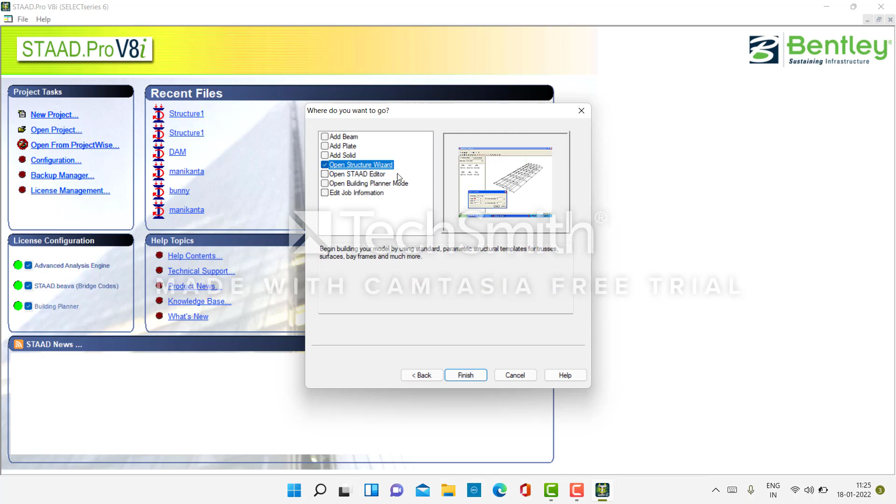Click on next, go to open structure wizard and complete the page. Then the interface looks like this. Go to frame models and select bay frame, then double click.

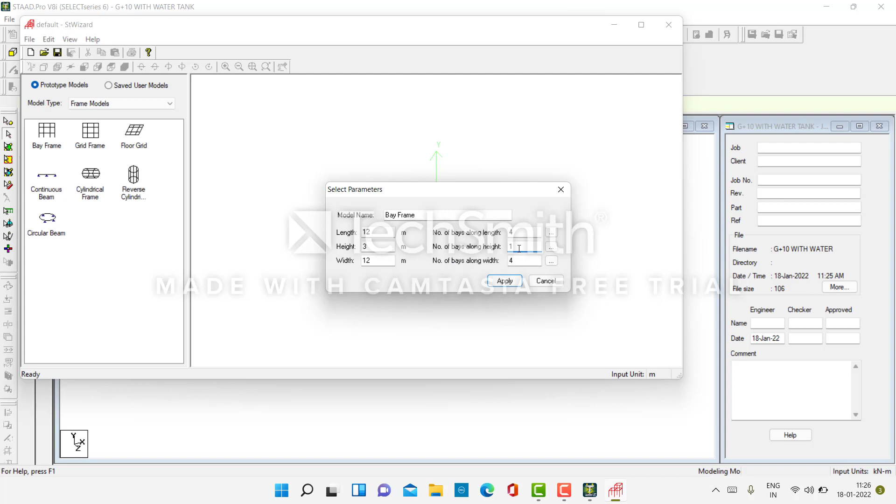In bay frame, length and height: length is 12 meters, height is 3 meters, width is 12 meters. The number of bays along the length - here 4 means columns and beams, known as 4, and here also 4. This is the floor - how many floors it will contain is known as the floor. Click on apply.

The structure will be available like this. Then close it, click OK, and click on OK.

The interface looks like this. Go to the top view, go to cut section, and select to view. Click OK.

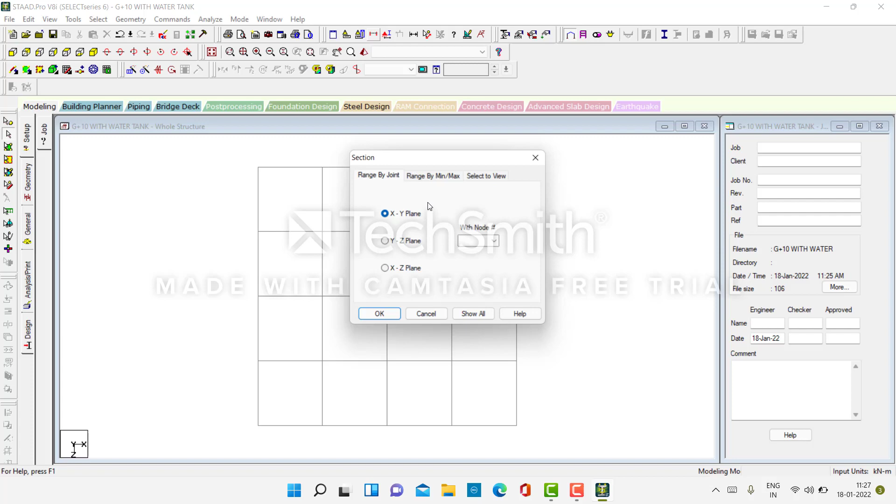Then select which side you want - this side or this side or this side, your wish. Which side you want, you click easily. Go to cut section and select to view, then click OK.

Then drag it to select one side. After that, go to the isometric view and select the beams.

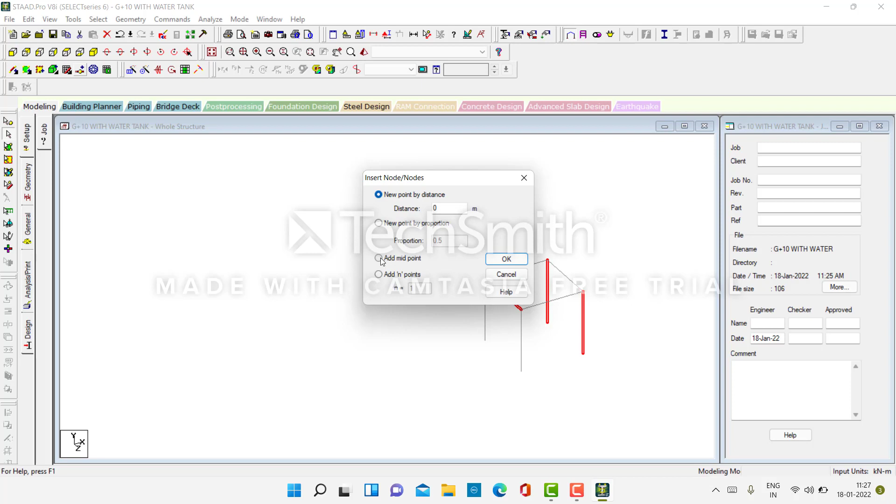Please control-select the beams. Then go to isometric view and insert the node, clicking on midpoints. Then click OK - it will come on the midpoints.

We can go to the node cursor and we can see the midpoints like this.

Then select the midpoints, Control C, Control V, in the X direction minus 1. Click OK. Why should we take it as -1?

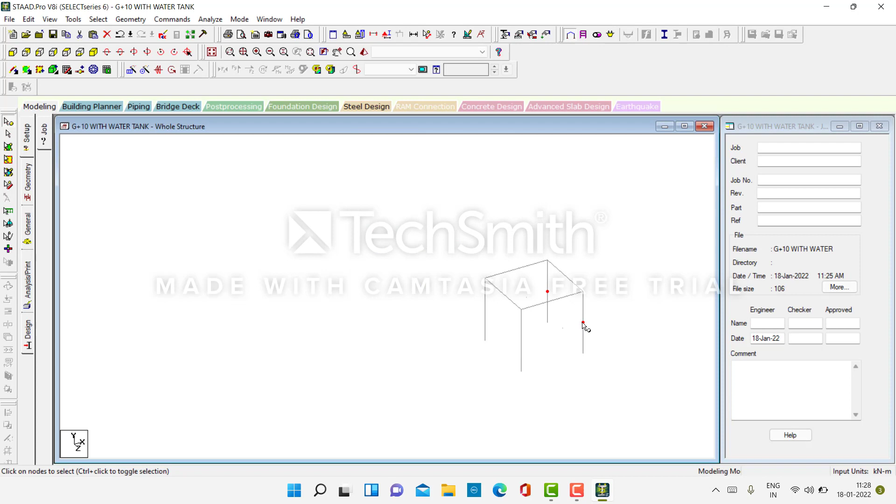It will come to the steps. I want the steps, that's why I click it like this.

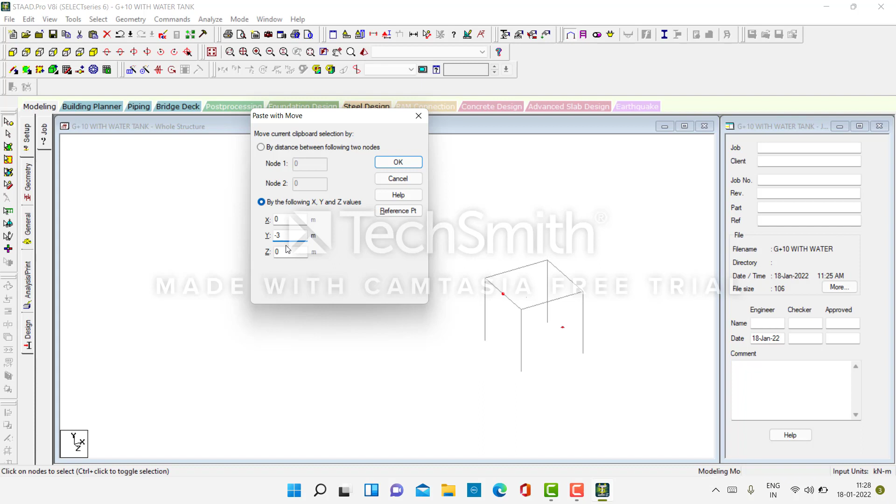Click here and exit, Control C Control V, and the direction - we can see the directions here is -3. It's downward, so I need -3. Click OK.

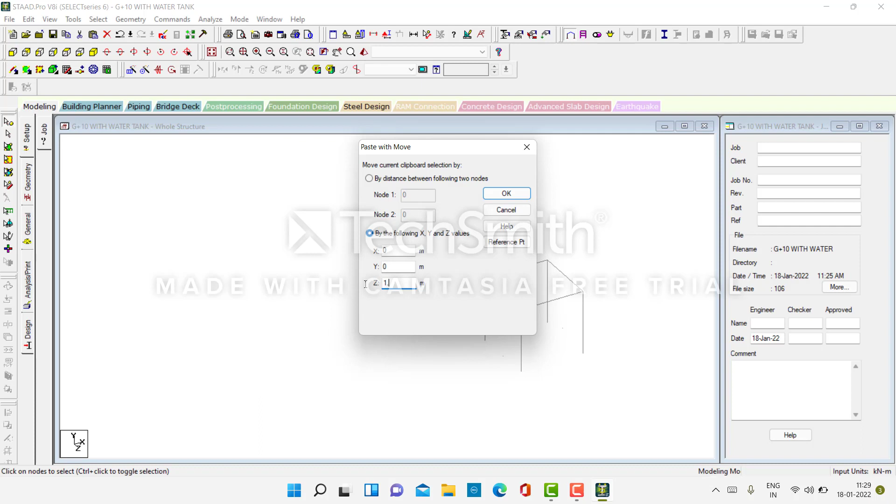We can easily see the node points. Then click here, Control C Control V, in the Z direction 1.5 - I need midpoints.

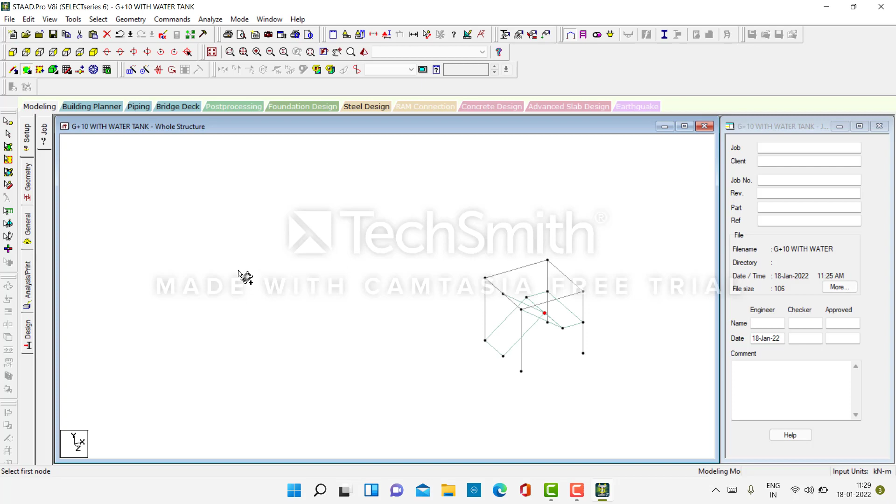Here we can see the midpoints. Then we easily add the node points here, here, here, here. Then we add it here, here, here, here, here, here, here. Then we add the beam cursor here, at these points here.

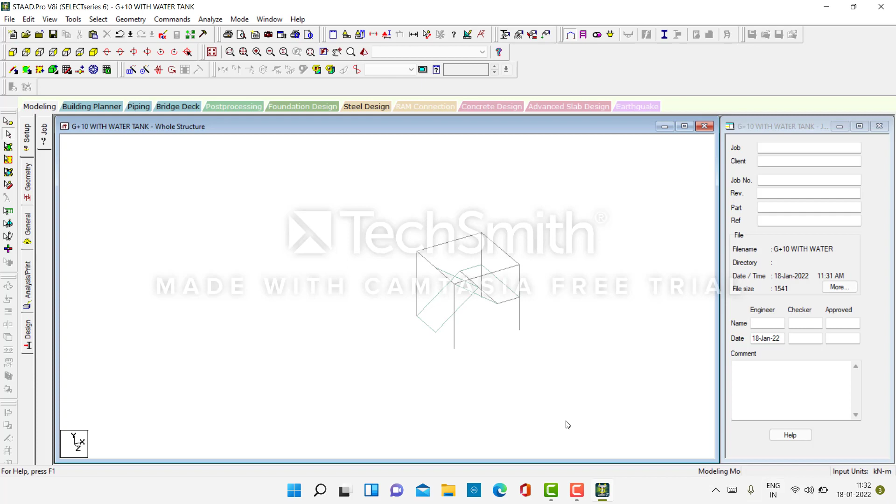For these points we add it like this. Then go to the whole structure and go to the node plates, adding the node plates here for these points.

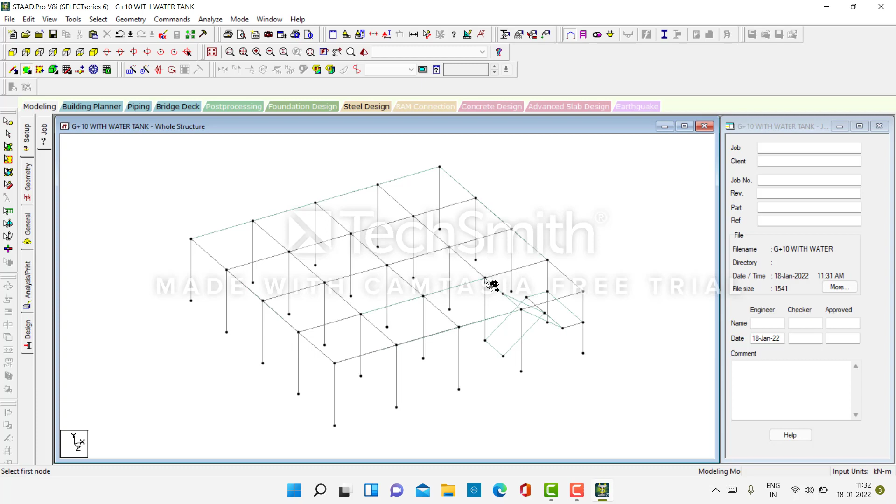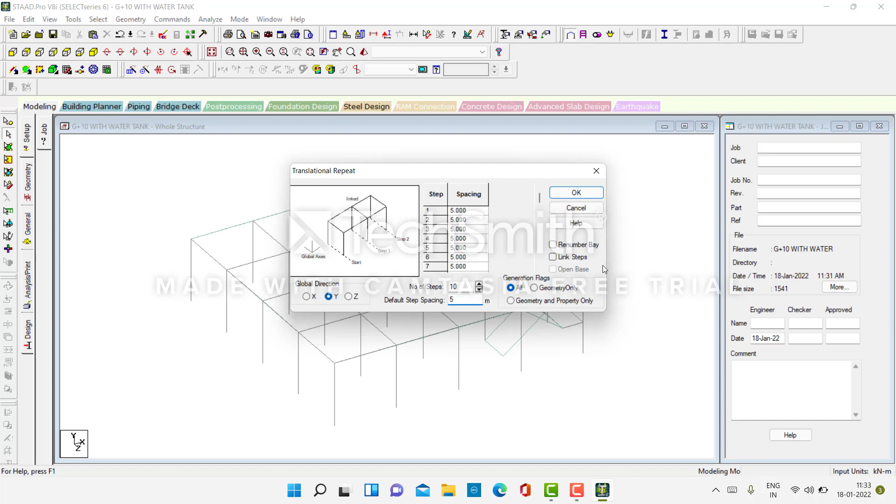Then go to translational repeat in the Y direction - it's toward the upward direction. So the direction is Y direction, up to 10 floors, and the height spacing is 5 meters, and linked steps should be added. Click OK.

First we select Control A - first we select all the structure, the whole structure. Then click OK. It will come like this.

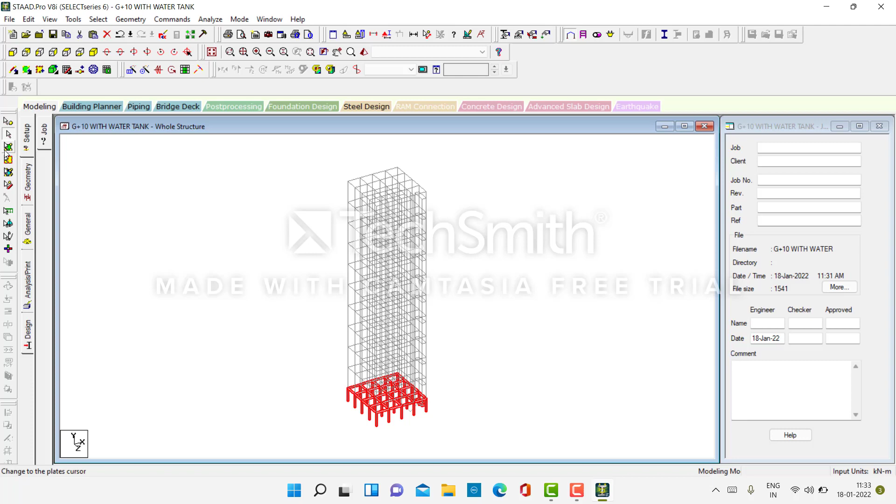Then go to the plates cursor and select the plates cursor, using the same translate method - translational repeat in Y direction at the steps of 10 floors and height spacing of 5 meters, then click OK. It is easily added - we can see it like this.

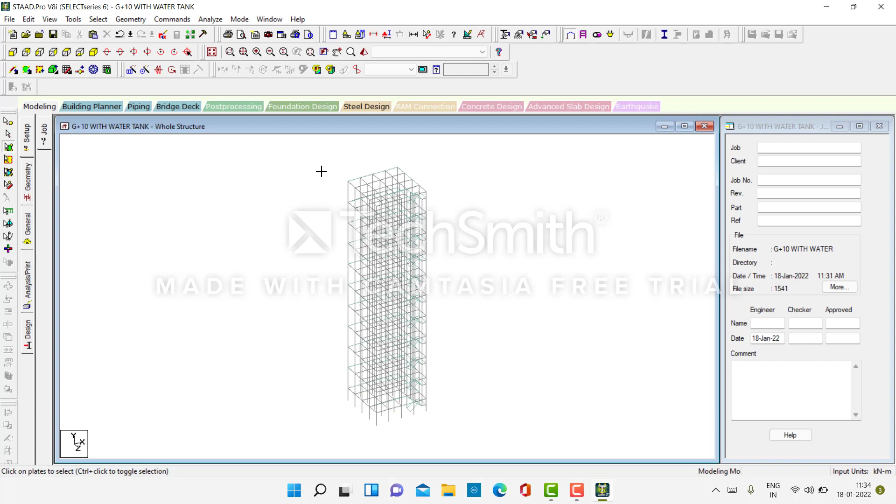First we select the node points - go to the node cursor and select the points. Which are my points?

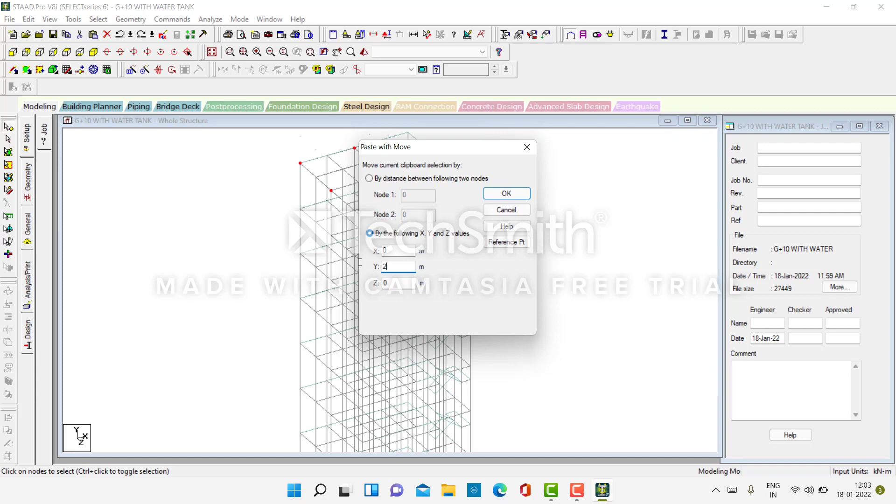Control C, Control V, in the direction of height - the tank height distance is 2 meters. Click OK, and we can see the node points here.

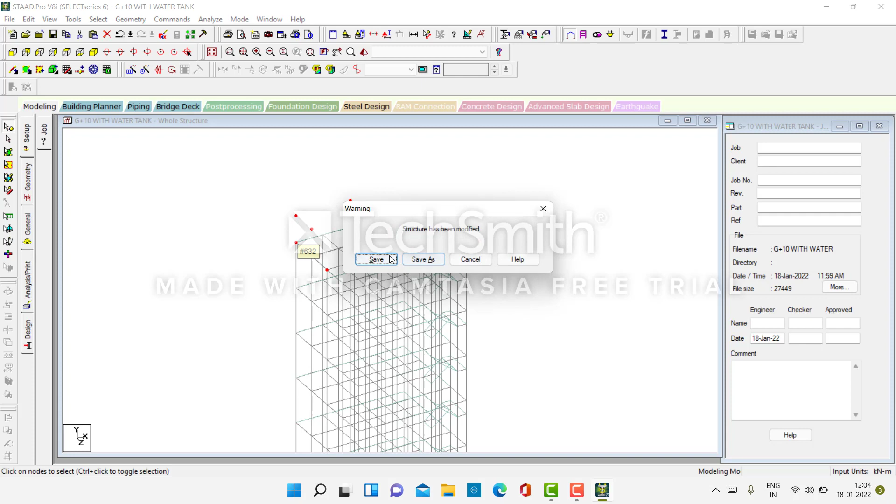Then click here. Then go to geometry and go to connected beams along the X direction.

Go to geometry, connect on the X direction.

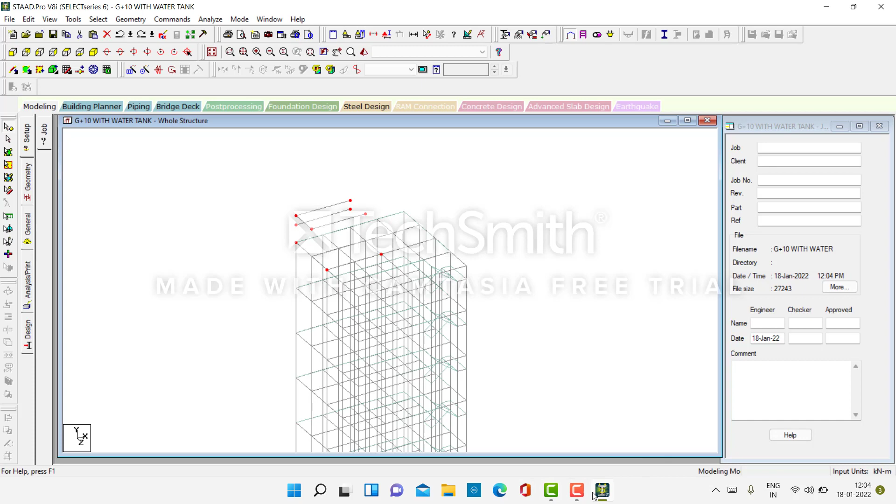When we select both node points, go to geometry and connect to the beam along the X direction, and geometry along the Z direction.

By that we get the node plates of the tank structure. Go to node plates and add the node plates - these points should be added.

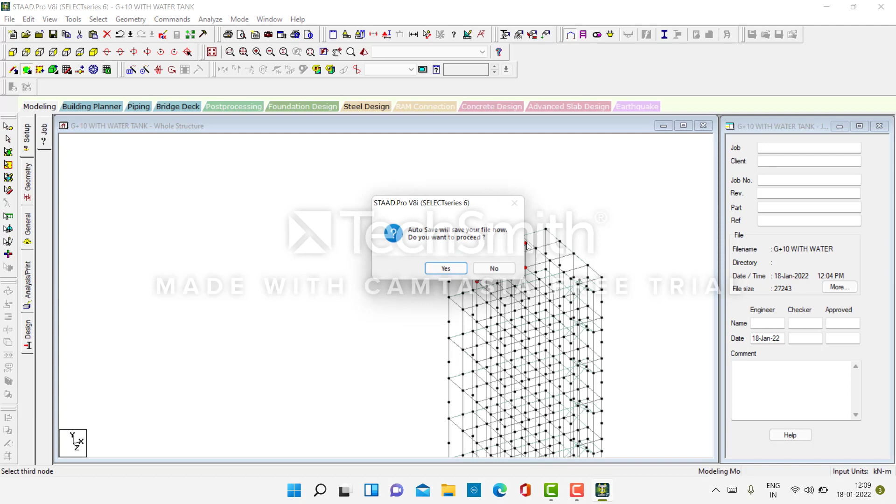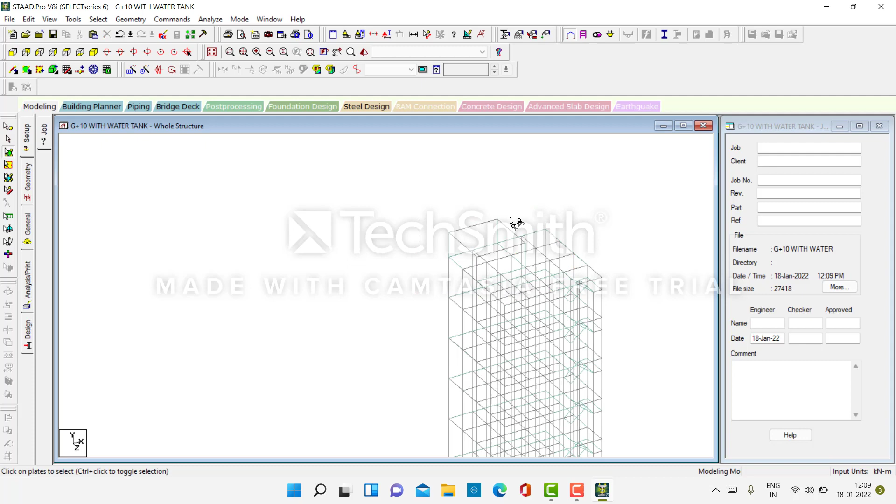We can see them easily, which box we can apply to. We added 3 sides only, so we can add this side and the back side. Go to the node plates and select.

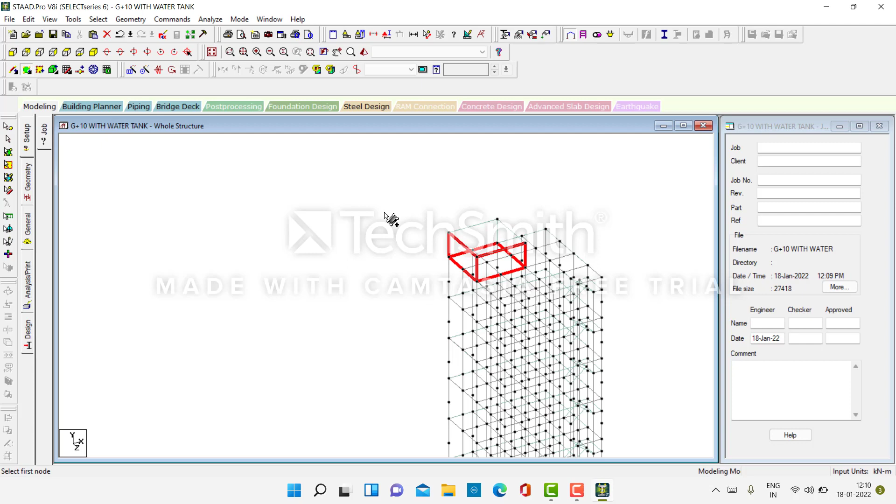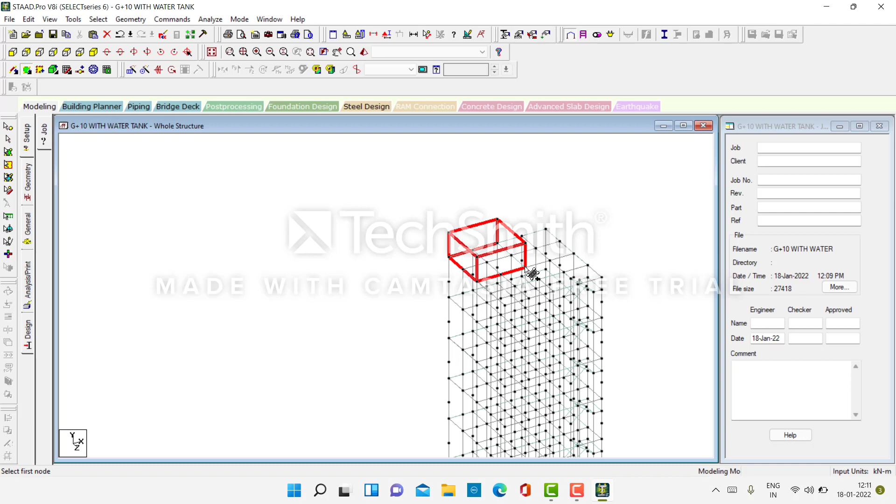We can see, okay, this side and downwards we have not added the plate, so we should add the plates. Go to add cursor here. Okay, we added. Go to the cursor.

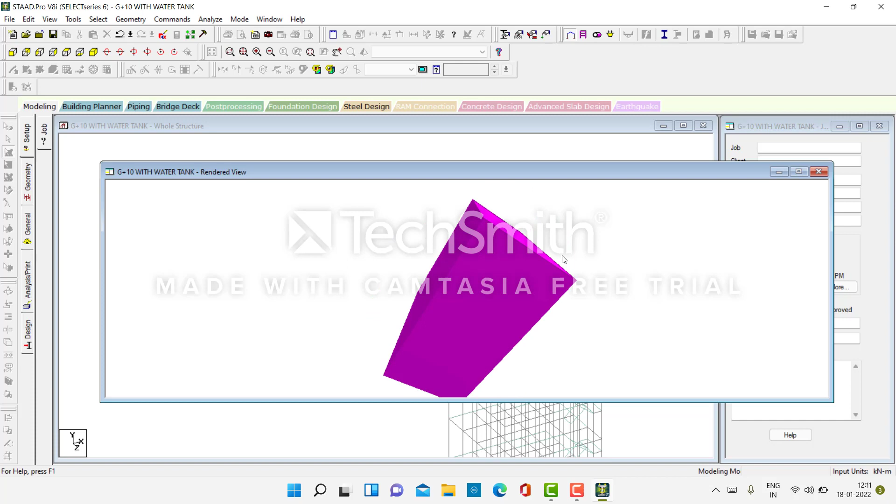We can see the tank. We completed the tank, and go back to the general and go to define. Go to rectangle, we're giving the sizes of the beams, beam and column size.

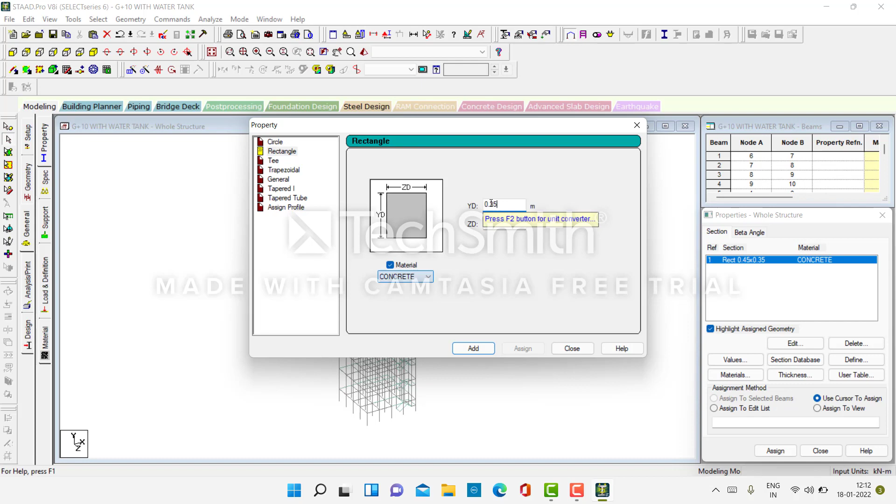This is the column size, and this is the beam size, and close it. Go to the thickness. This thickness is 0.15, my thickness is 0.15. We can easily assume this, and close it.

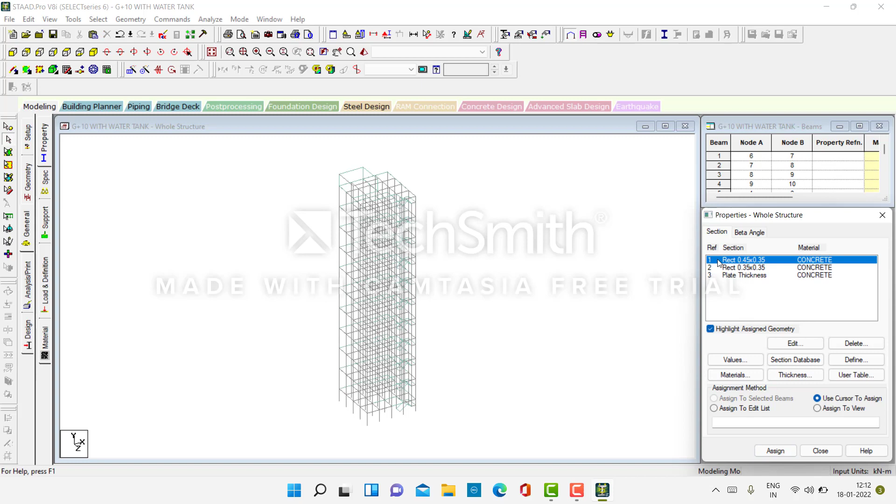Go to assign. First of all, we select the beams, then we select the columns. Beams parallel to the Y direction are assigned to selected beams. Assign, then easily assign, and go to the same line.

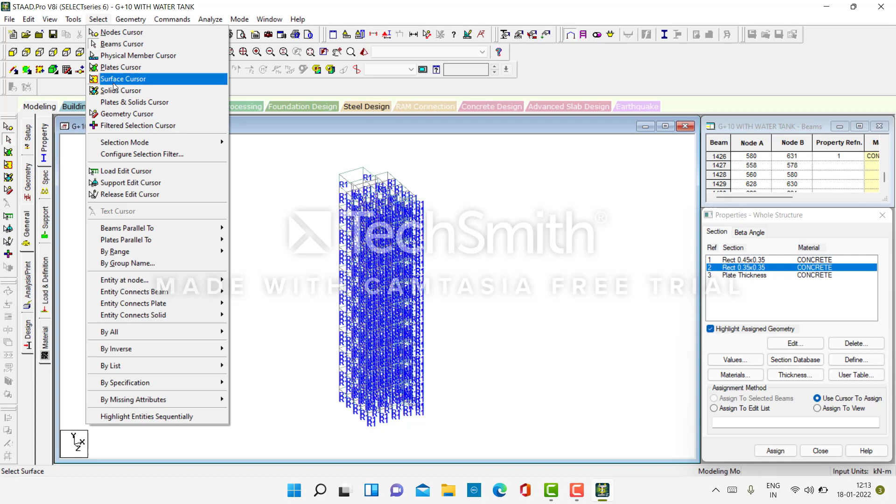Select beams parallel to the X direction and select beams parallel to the Z direction, and assign those selected beams. Okay, assign was completed. So go to the thickness.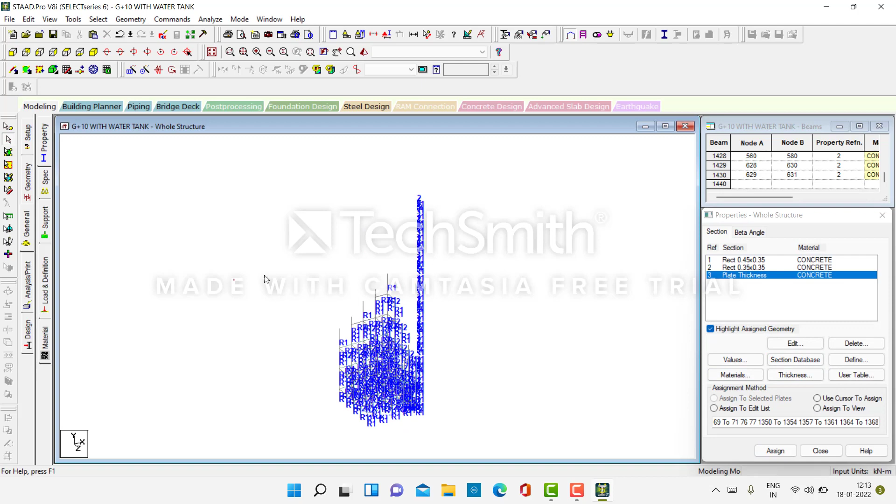Assign to view, assign. Directly we can see the assign. We can easily see the 3D model, see, we can easily see.

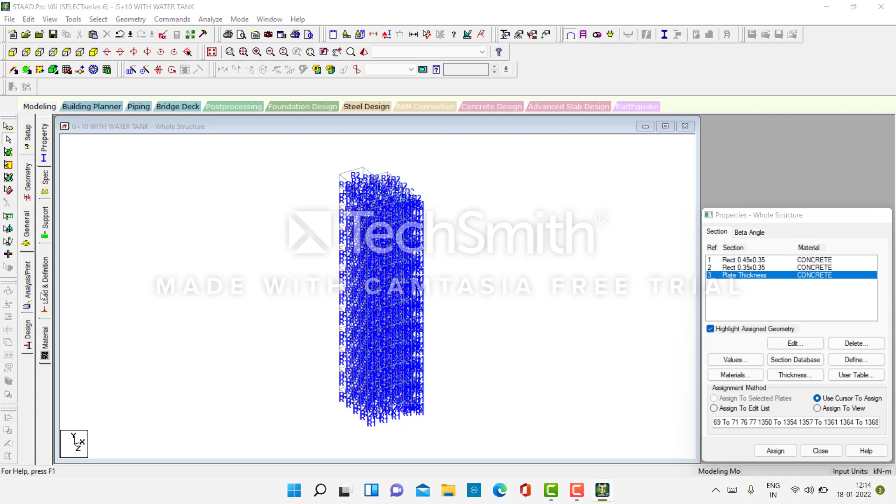Then after, go to loads and definitions. In loads and definitions, first we should add the seismic, and we should take the Indian code, IS code. Okay, in some systems it will be generated automatically, but in my system it's not getting generated. So my zone is 1, and ST is also 1.

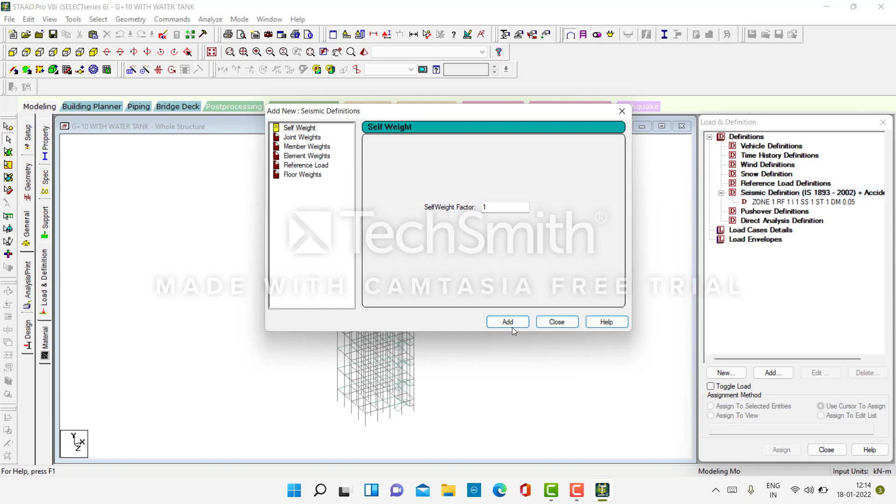Added, and self-weight will also be added, and close it. Then after wind load, go to the wind load, added, close. Go to the wind load and add, in custom calculate as ASCE 7.

Click on the option and open this. We select category 4, why? Because in the building calculation we take this as an assumption. This is the wind speed. I selected, sorry, we selected Hyderabad speed in meters per second.

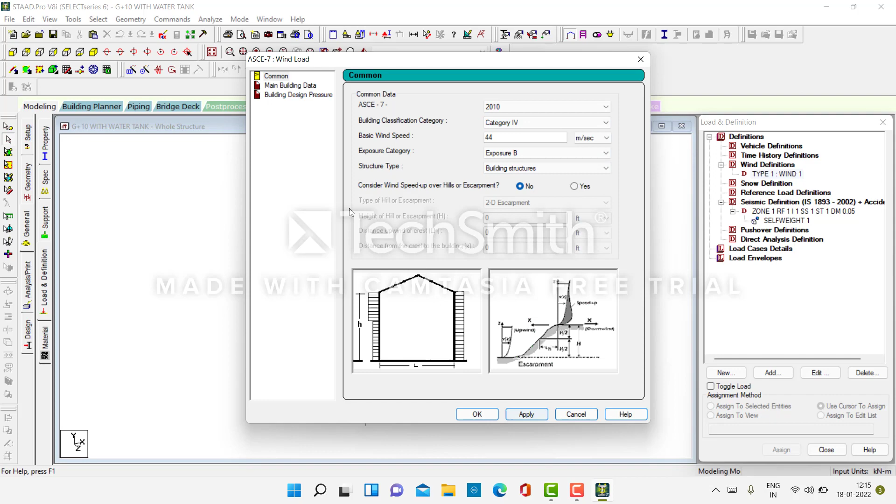We should select, and next simply applied, and go to the main building data. Then after the building height, top of building height, which is my height is 3 meters into 11 floors, meaning 33. And here building length wind is 12.

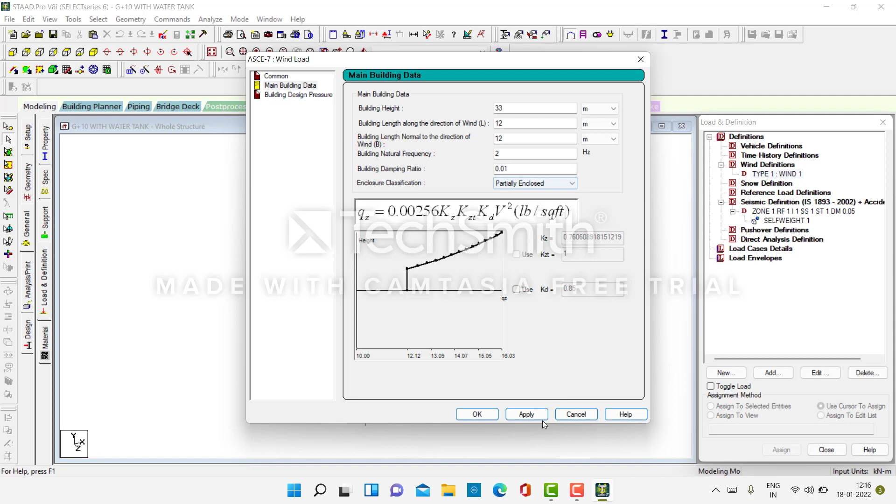Building length of the normal direction by wind here is also 12. Then go to the meters, we should keep it in meters, and then simply applied, and go to the building design pressure and simply apply and click OK. And here added, exposure is 1, we should add, OK close it.

Then after we can assign to selected view and assign. Then after load case details, and we should add in the load case, we should add seismic, earthquake x direction 1, and earthquake z direction.

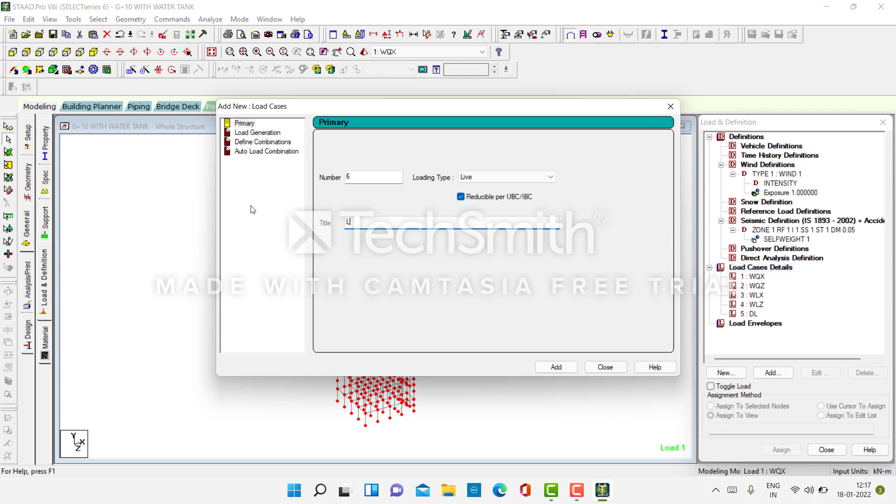Next we should add the wind load also, we should add W wind load in the x direction and wind load in the direction of z direction. Add, and dead load we should add as DL, and live load we should add as LL. Then after close it.

Then we can assign, we easily added which type of loads we should add in the structure. Then we can assign, in the earthquake x direction we should add and seismic load, go to seismic load in the factor, 1, x direction we should select the x direction and close it, and z direction we should add same like that, only direction will be changed, same value.

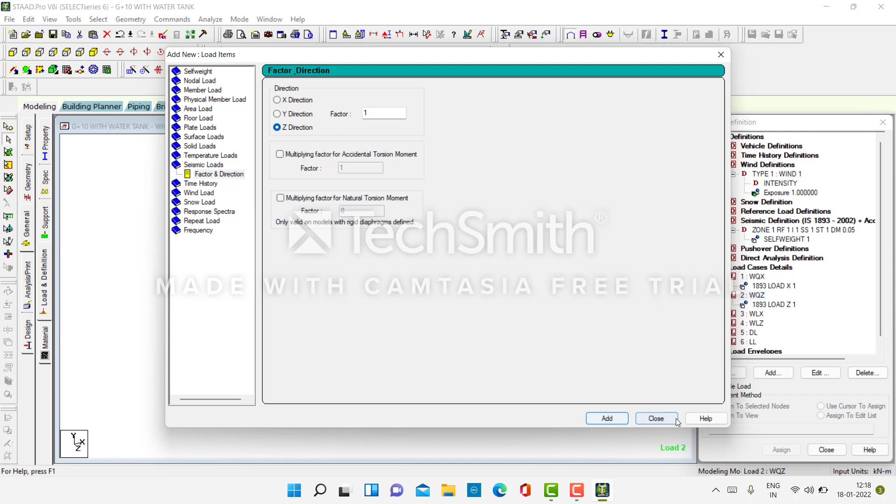Okay, close it. Then next we should add the wind load. In wind load we should set wind load cases, minimum range is 10 and maximum is 33 at the x direction, and close it.

Close it in that z direction. Okay, you can add another one also. Yeah, range 10 and 33, this is the building height.

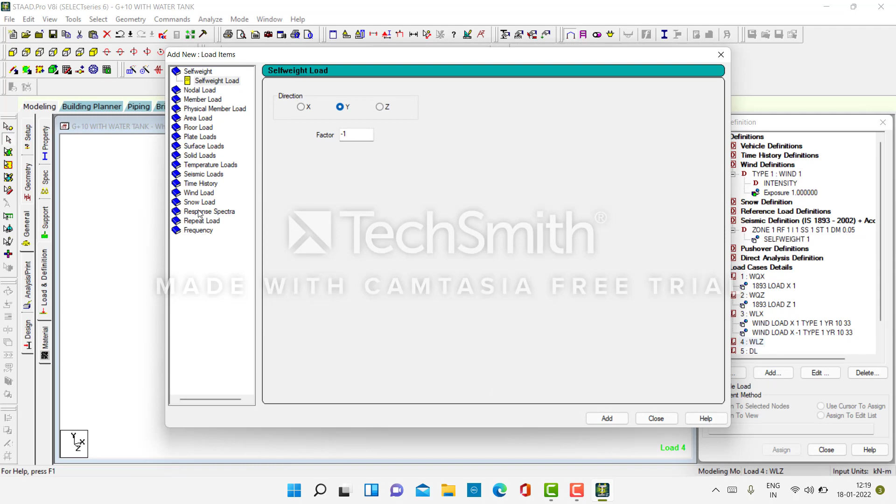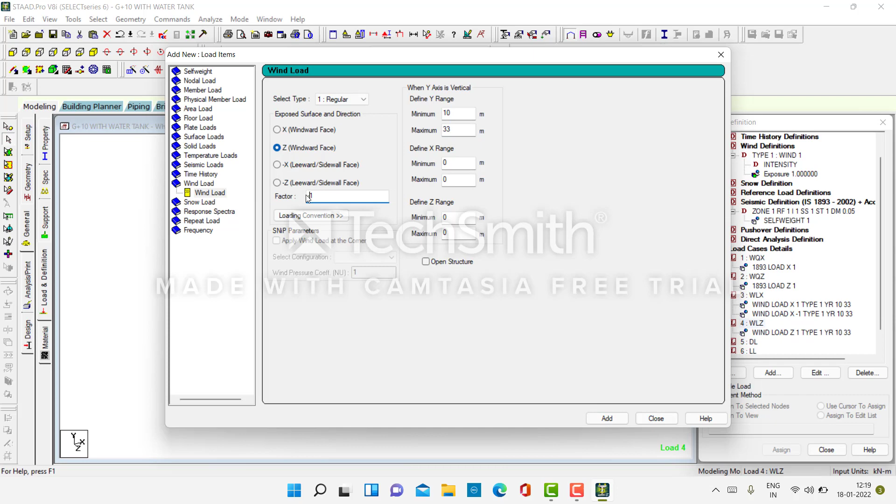This is the -1 we should give, add +1 and -1 we should give the wind surface in wind z direction. Go back, go to the z direction, we should add 10 and here 33 added, and here minus we should add it. Okay, add it, close it.

Then after we should add the dead load. Dead load means self-weight load will be acted. Close it. Then after live load added.

In live load we should add only plate loads. Plate load, we should add the pressure on the full plate, which is 3.75 in the direction of minus, we should add it.

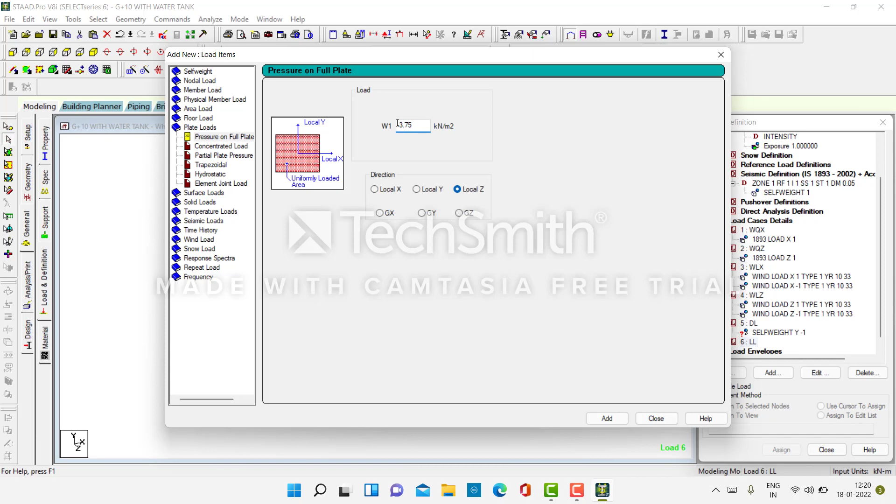Okay, close it. Then after we can assign it, assign to selected view, assign to selected view, assign. In the load cases we should add it. Then after go to materials, we should add the concrete, assign the selected views, assign.

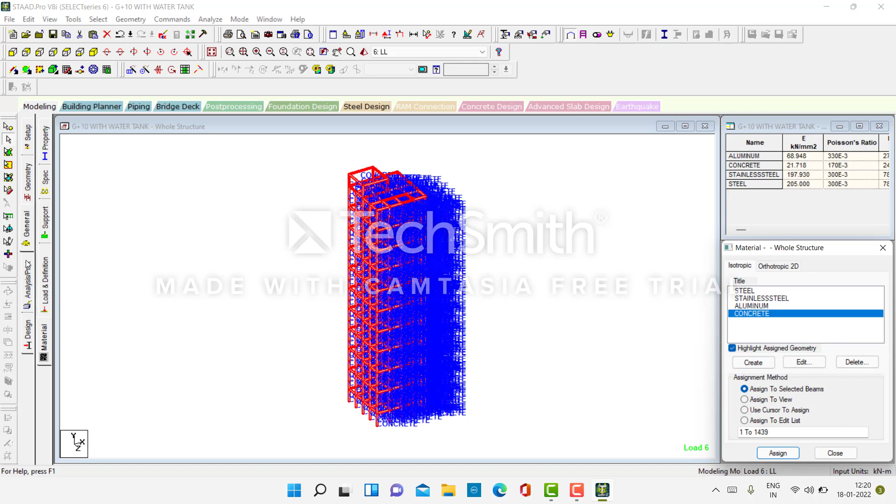Next we should check it, analyze, print. Add it, close, and analyze. You can see we did not give it support, so we got an error.

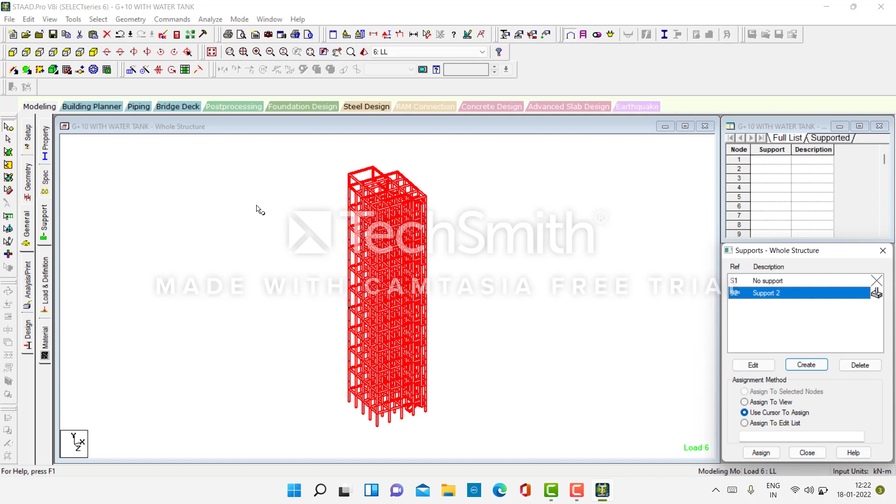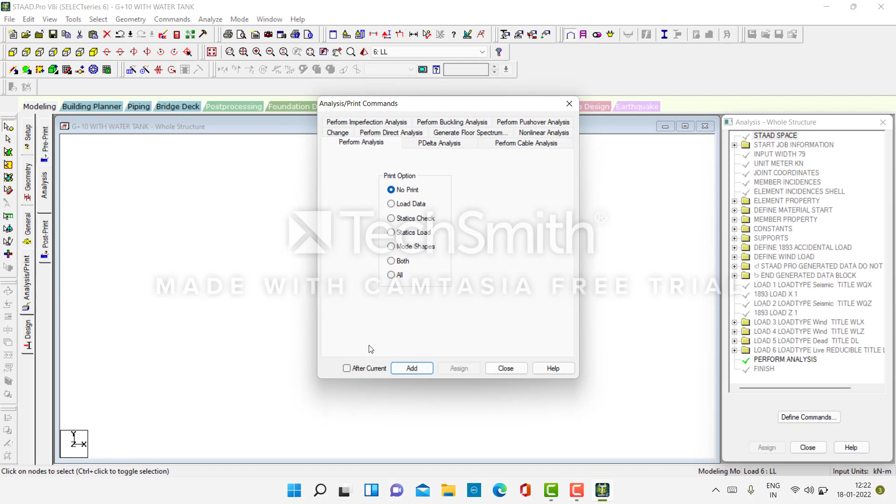Go to general and support, click on supports, create support, add a fixed support and click on the supports. Then go to the front view and go to the node plates. We should drag it like this and assign the selected view nodes and assign. Okay, then after analyze, print, close it, and go to analyze, run analyze.

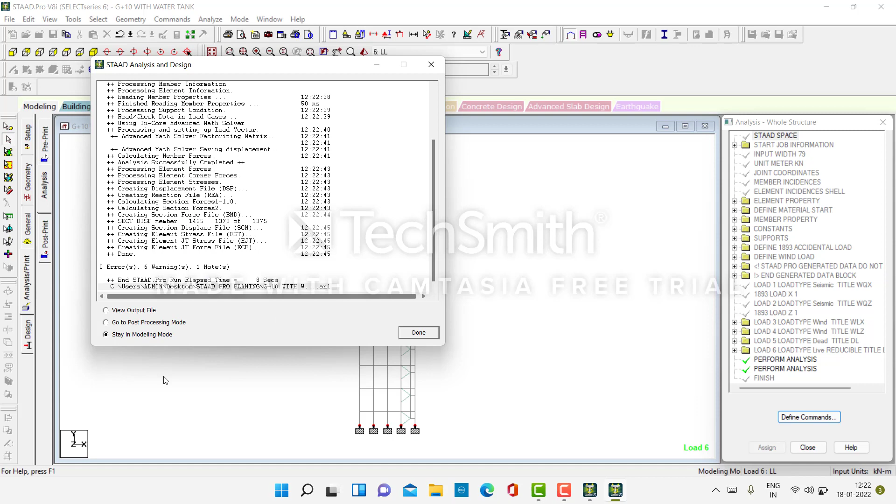See here, 0 errors and not worry about warnings. We can easily check it, we did not get an error, so we go to the design and select the parameters. We first select the concrete material and go, IS code will be IS 456.

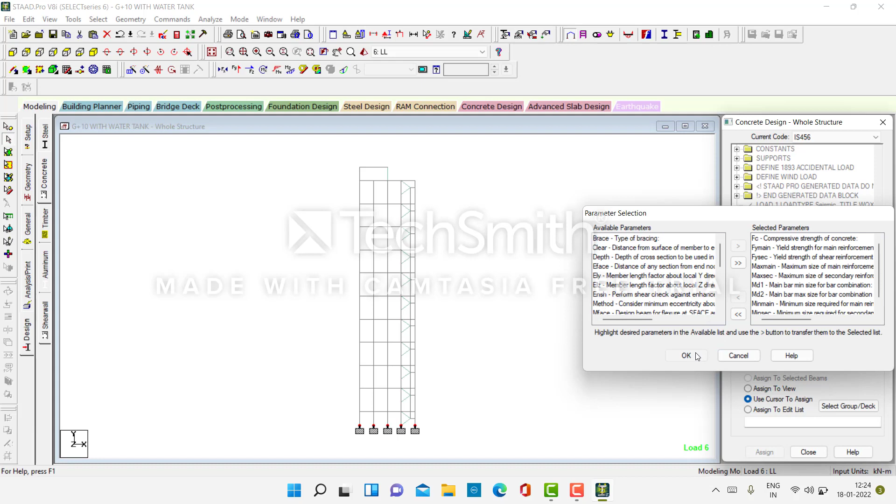Then after click on OK, go to the define parameters and FC will be 30,000, we can assume. Add, and FYMAIN we should select for 4,50,000 add, and FYSEC also I'm taking 4,50,000, add.

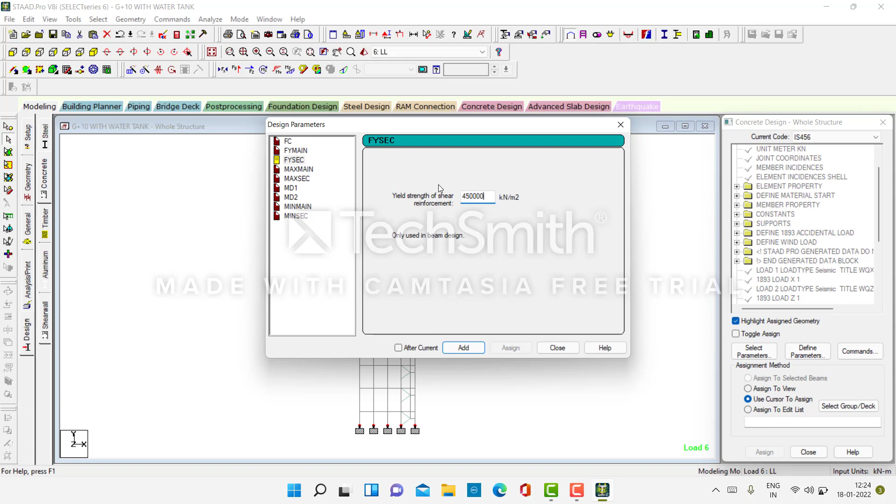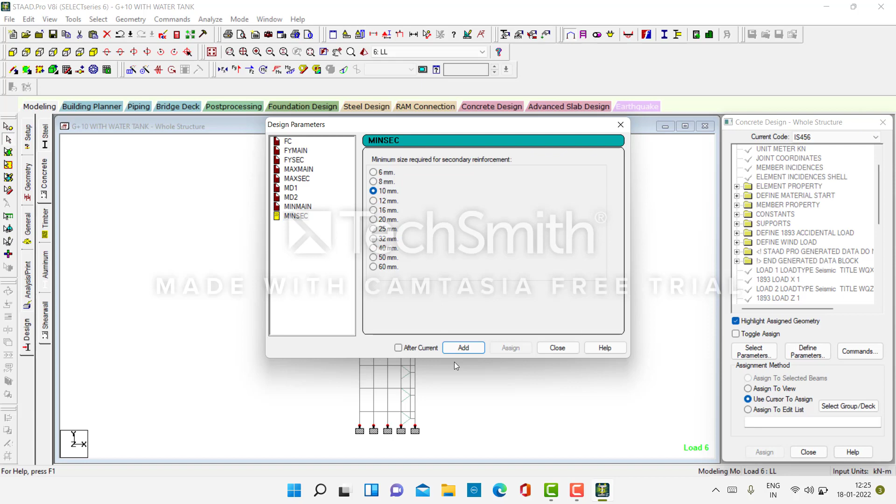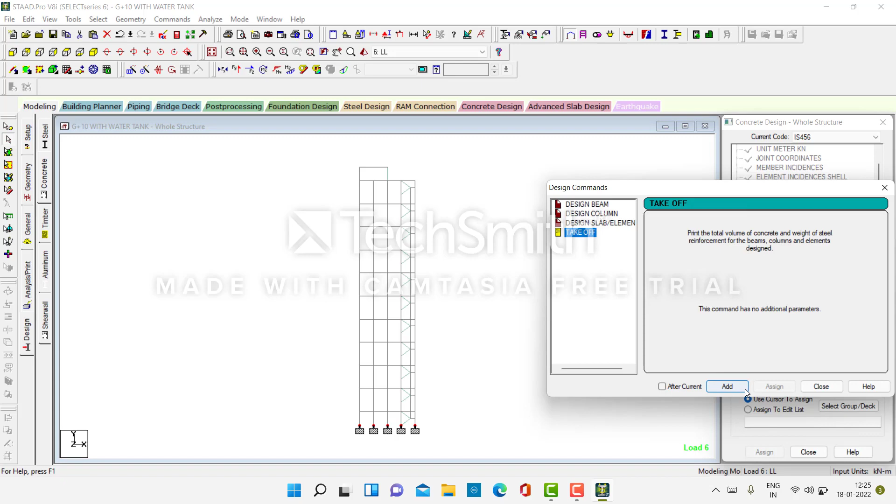Then after we should go to here, go to commands, add, we should add design beam, and design column we should add it, and slab also added, take off the also added, and close it.

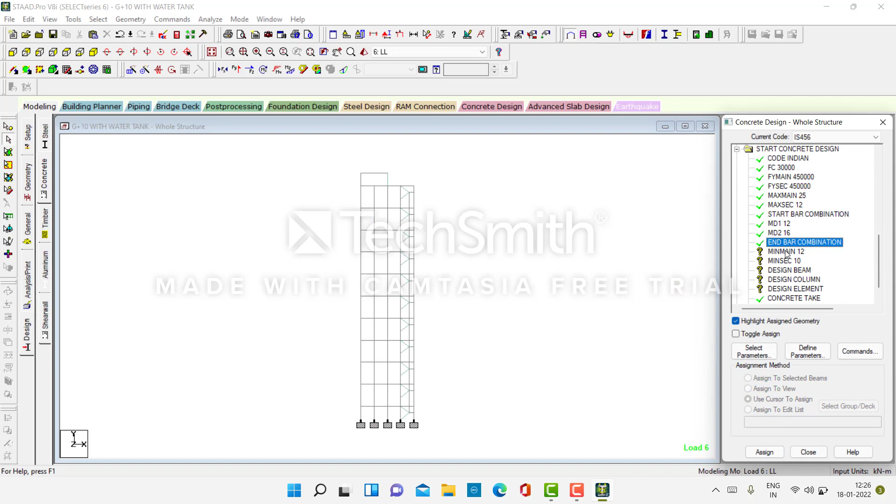Then after go to, we already selected values through, go to the assign to view, then go to here, assign to view, assign, here also assign to view, assign to view, assign. These all values we can assign to view and assign.

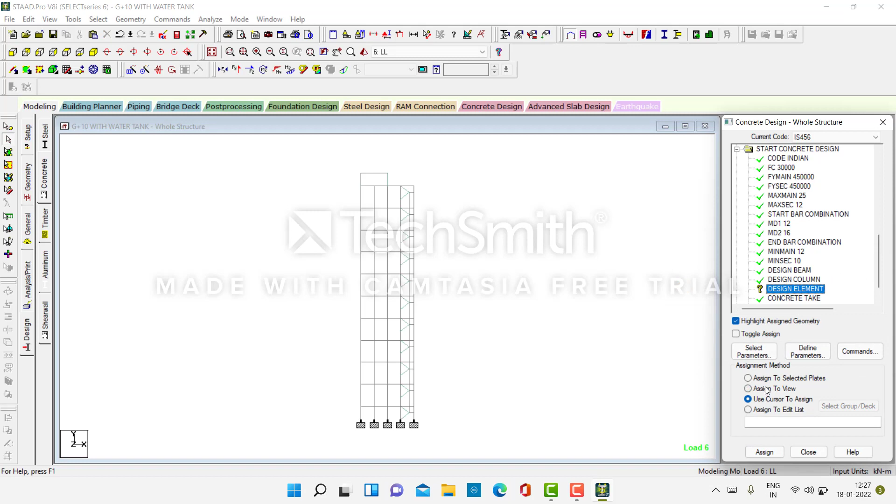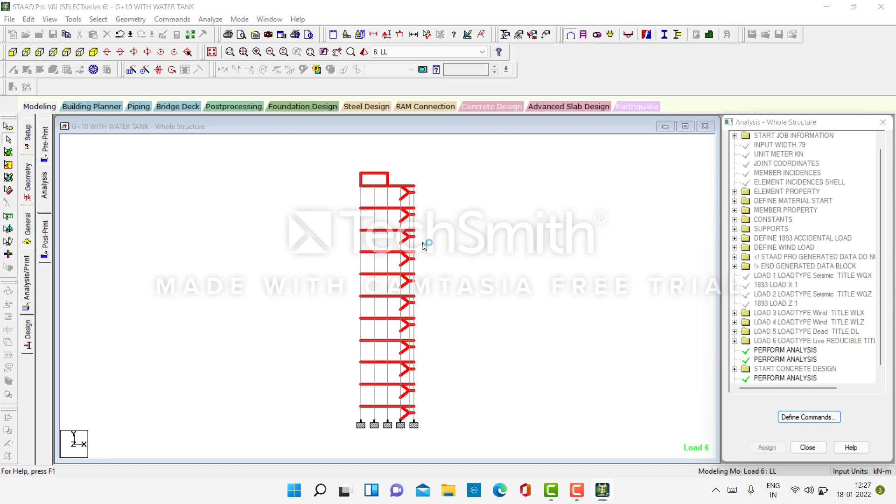Then after we should add all of the values to assign to view, assign. Then after we should check Analysis/Print and click on analyze, go to analyze mode, analyze control S. We can see, wait for the errors.

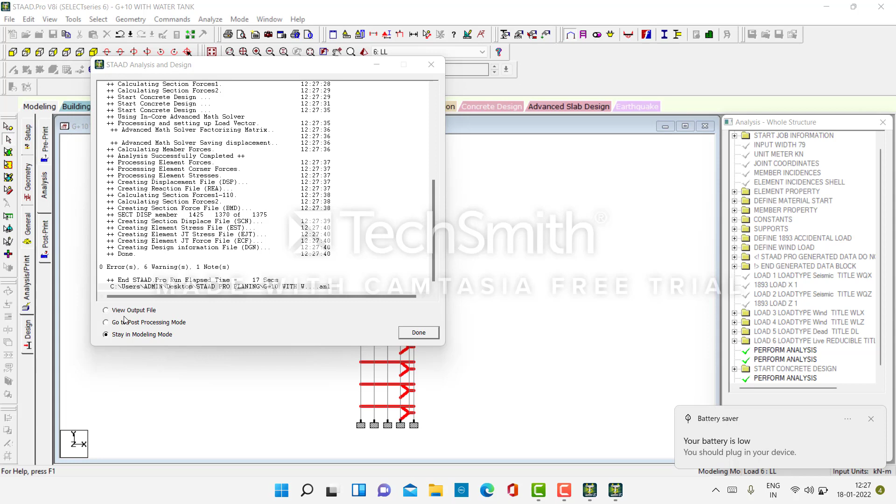We can see 0 errors, and then after we should go to the post processing mode and click on OK, applied all. Okay, then go to apply all and click on OK.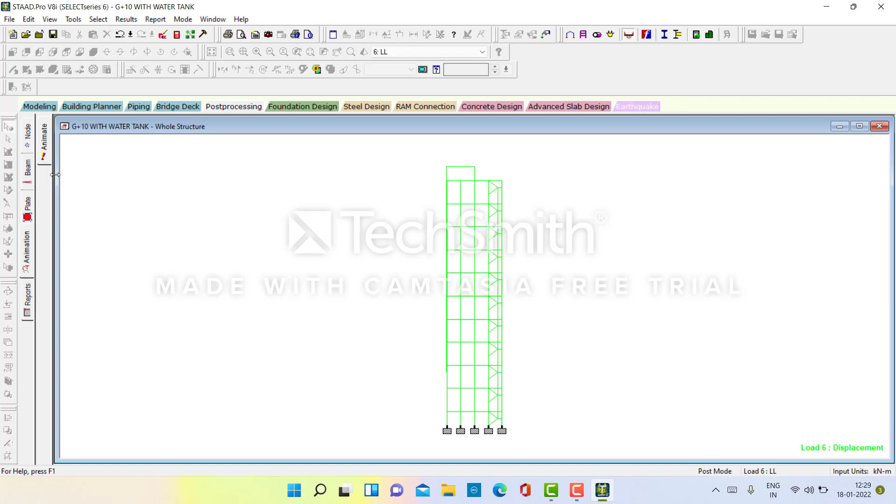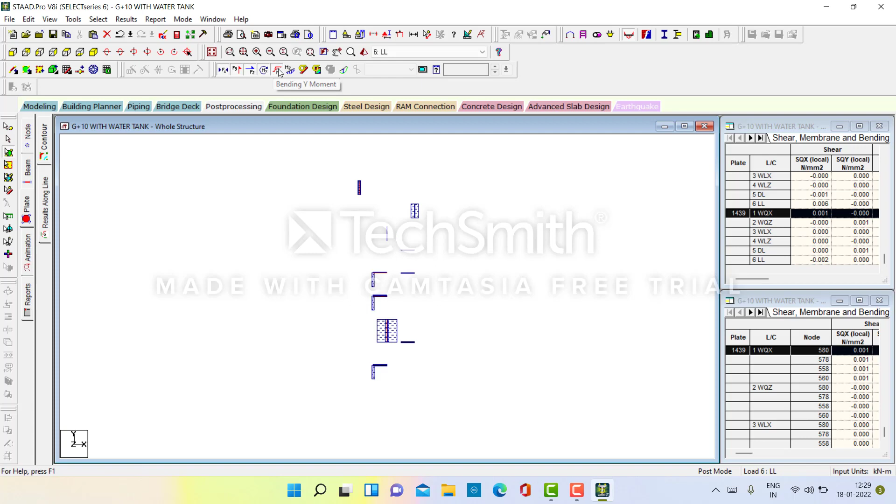Then after go to the apply, okay. We can see the moment, shear force, and shear for Z direction. This is the moment, this is the bending moment in Z direction, and beam pressure and beam plate pressure. This is the plate pressure.

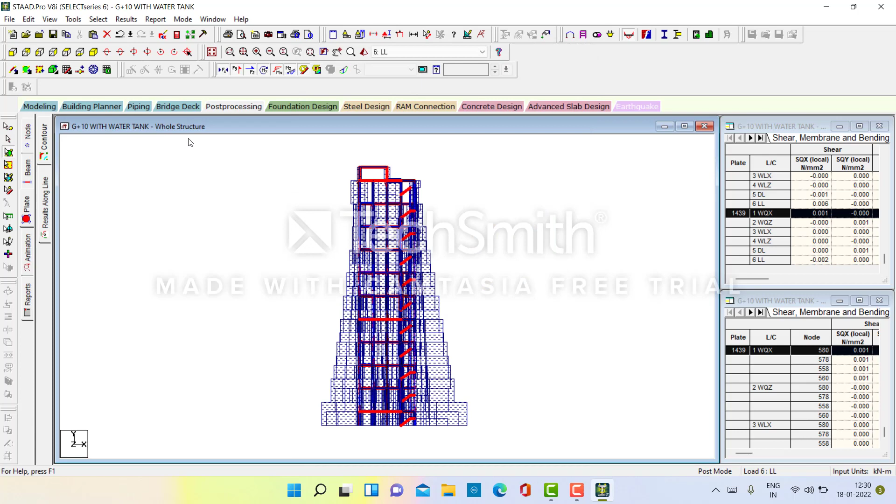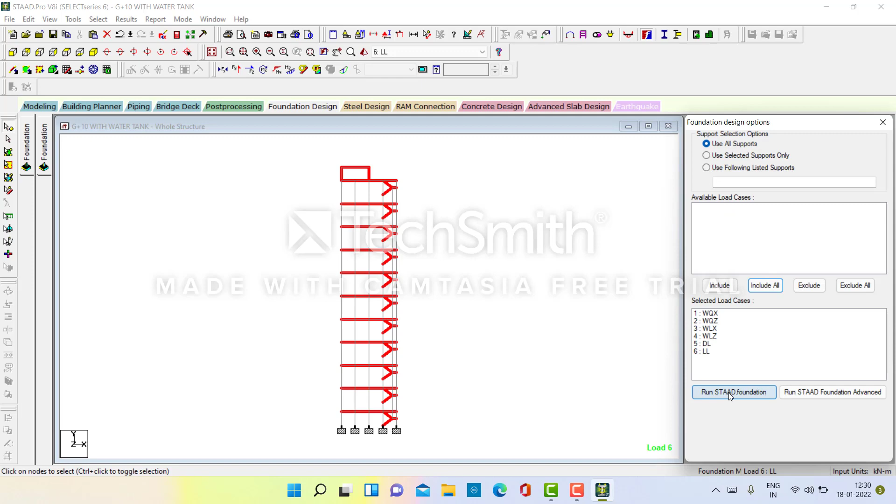Then after go to the foundation, and here click on include all load cases and run STAAD foundation. We can see the footings of all this in the foundation. We can see all the footings which we can easily find in the foundation process.

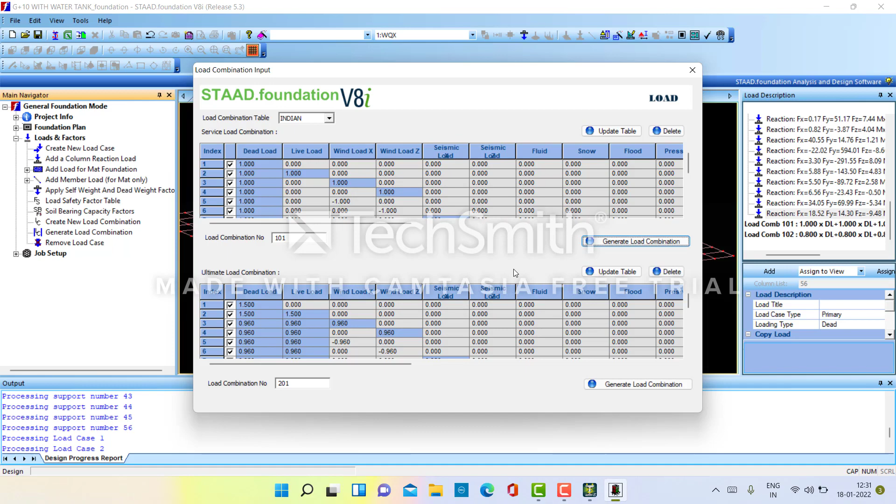Go to the loads and factors, click on loads and factors, then go to the generate load combination, click on generate load combination. Then after click on Indian, we should select Indian - we already selected Indian, so that's why we selected Indian. We should update the table, it will be easy to generate the load combinations, and here also update the table and generate the loads and combination.

Okay, then after go back, go back to job. Next we can find the job setup and create the job setup, and here we should give the name. My structure name is G+10 with water tank, G+10 with the water tank.

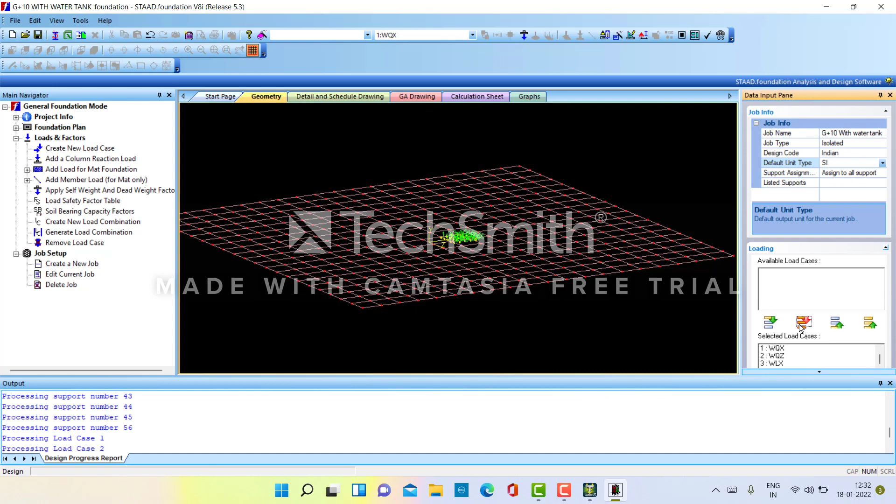Then go to the design code, it's India here, yes, and that's it. Go to including all load cases, create a job. Next create a job, then after go to the left side we can isolate footings and jobs we can take.

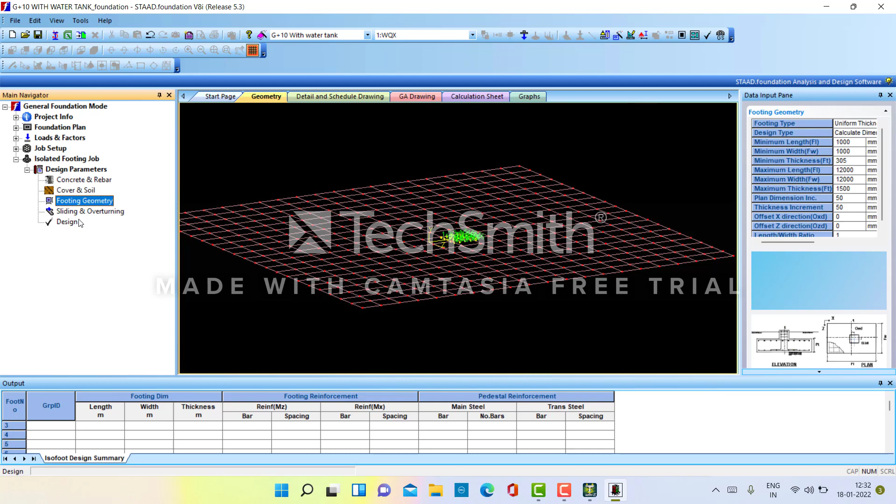In that, design parameters will be there, and go to the design parameters we can see which loads will be, foundations will be, we can see, and go to generator design, and yes, we can wait for the calculation sheet.

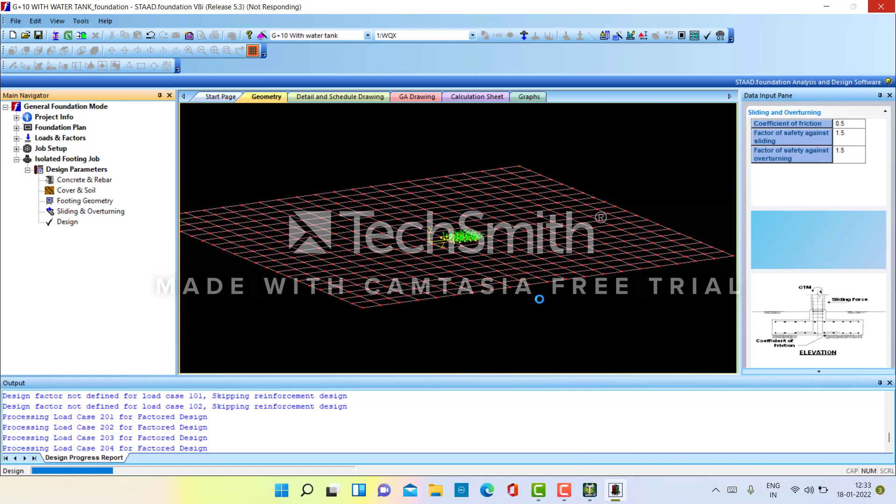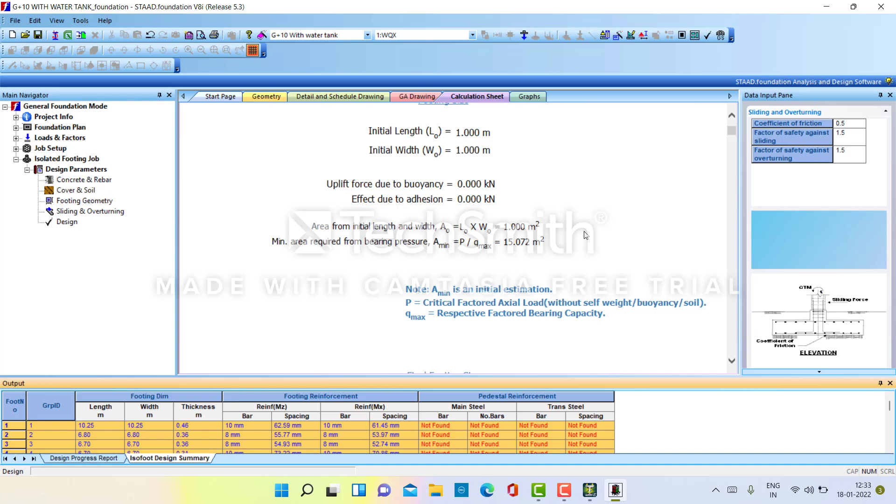We get the footings, how many footings we get here - design per isolated footing 56, we get 56 footings. Like this we can see the footings graph. In the detailing whole structure we can see the whole structure detail sheet, and this is the GA drawing, and this is the calculation sheets.